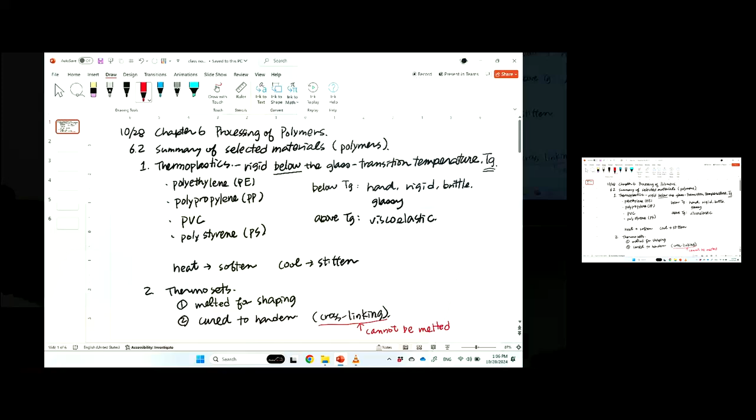more. So previously, with thermoplastic, you heat up, and it's going to be softer, right? So those are the two fundamental differences. Okay? So can I change page? So it's a continuation. In this case, thermoset, and heat, right?

So that's to stiffen, right? And then cool down. So it's still stiff already, it's just cool, it's like curing. No change. I mean, it's not going to be softened. So basically I will go like that. That's cool down. So that's a major difference.

And then this, cool down, or even heat up, that's curing, right? So this stiffens or becomes even harder. That curing part can be chemical, like epoxy, but also radiation, sometimes light. Radiation is also curing, kind of heating inside, and then the polymer is not softened, it just goes back to room temperature, you just have to cool down.

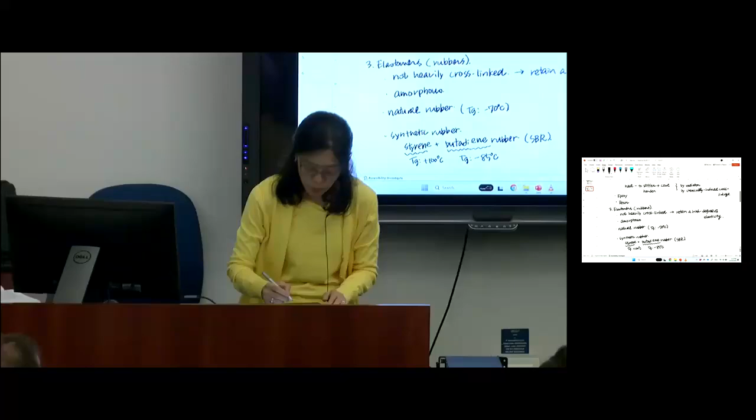But it means their tire has to withstand that kind of severe high temperature and also sliding. So they're totally different, but it's still rubber. Like, the color is black, right? And so anyway, that's how they manage. So this ratio is the key to control their performance, the product. Right? Again, Tg, they are controlling.

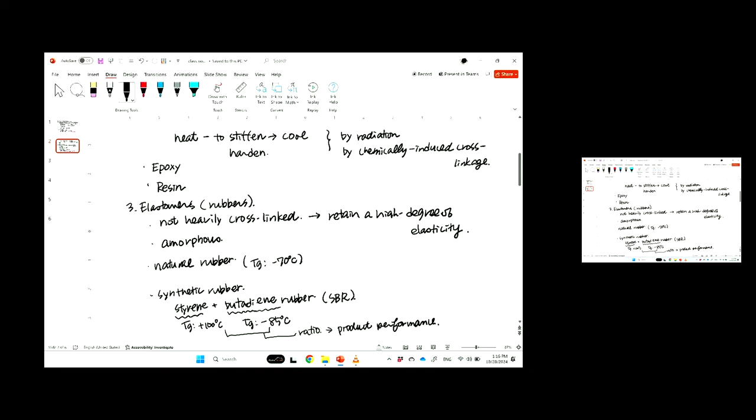So I think that's the review: three major kinds, and why they behave like what you see. So let's talk about the processing, because now we know what kind. So process-wise, section 6.4. Okay. So there are several things included in the textbook. I'm just going to list them, and then let's talk. I also want to share some video, but just the list first.

So extrusion. Extrusion is extrusion, okay? You know the metal or even candy, some rubbery candy. I don't eat that, but some Twizzlers, or something like that. Extrusion, right? And then injection molding. And then 6.4.3, that's compression molding. And then also transfer.

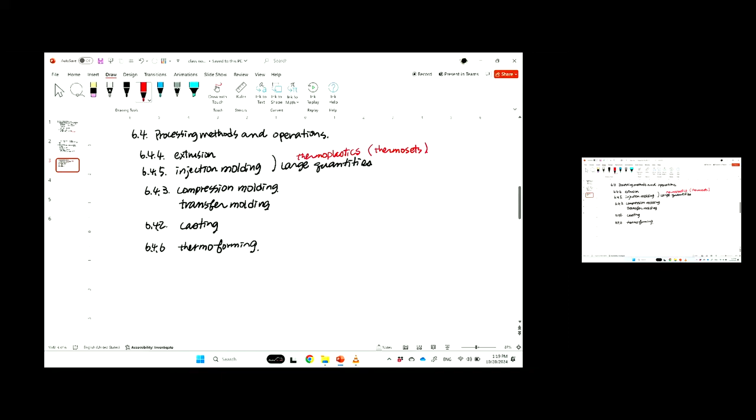Then compression molding. So thermosets, how they are made, how they can be used: compression molding. That's most of the case, because it's not flowable. So you put a little bit in, warm it up, and then compress. Again, I will share the video and the picture soon. And then also transfer molding, thermosets maybe used more. I will leave the figures: figure 6.15 and figure 6.16. And casting I've already covered. Casting is casting.

I think then, before we watch the video, thermoforming.

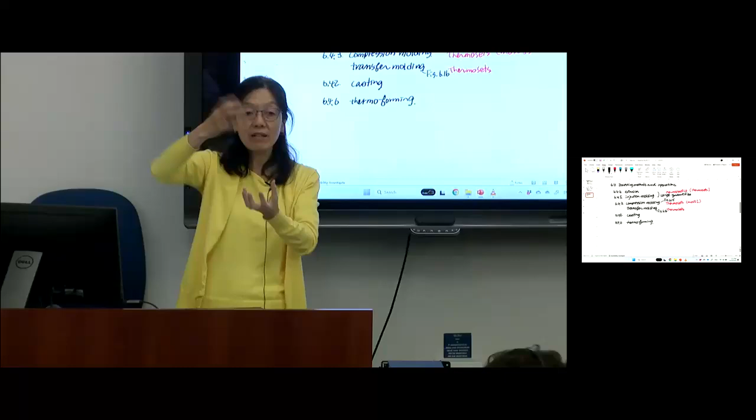Thermoforming is the one to make like a plastic cup, like a transparent cup. You pour a drink. She's drinking coffee. That's, sorry, yeah, that's one, right? Thank you for volunteering. That's thermoforming. Because how much is it going to cost? Usually it's like a stack, right? If you go to a store, you can buy maybe 30 or 50 at a certain cost, right? And then you are using it probably only one time.

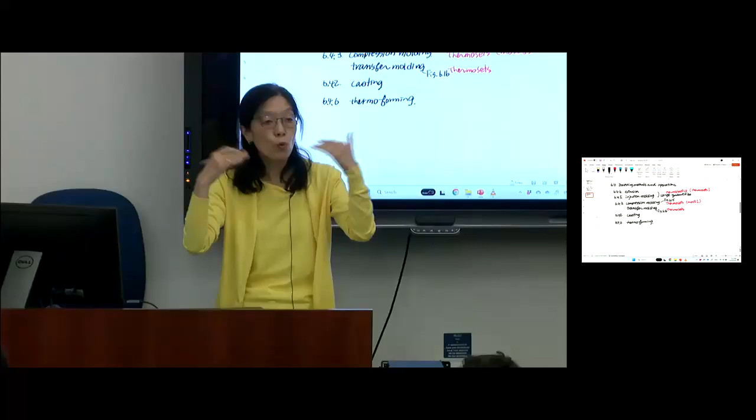So basically, starting from the film or sheet, you warm it up, and then you have a mold, and you warm up and also vacuum, and then adhere. Well, no, I shouldn't say adhere. Just maybe replicate, or cover the mold, and then you remove it, and then you can go to mass production.

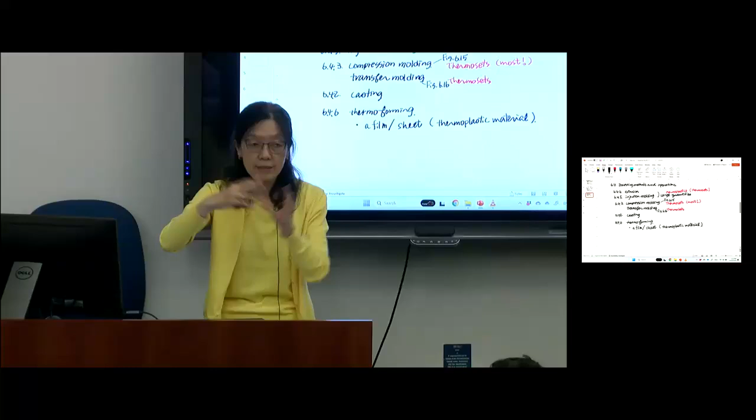Okay, so the key of thermoforming is a film or a sheet of thermoplastic. So basically it's heated above the transition temperature, and then it softens a little bit, right? Since it's thermoplastic, it softens, and then you let it cool down. Okay, this is thermoplastic.

So for this you need a mold, right? And usually they use a vacuum mold, vacuum.

I think I'm using one too much. Vacuum. This is too much. Vacuum. I cannot write vacuum. Oh my goodness. U two, 2 U. I don't know how many. Professor doesn't know how to write vacuum. I'm in trouble. But anyway, this is the vacuum.

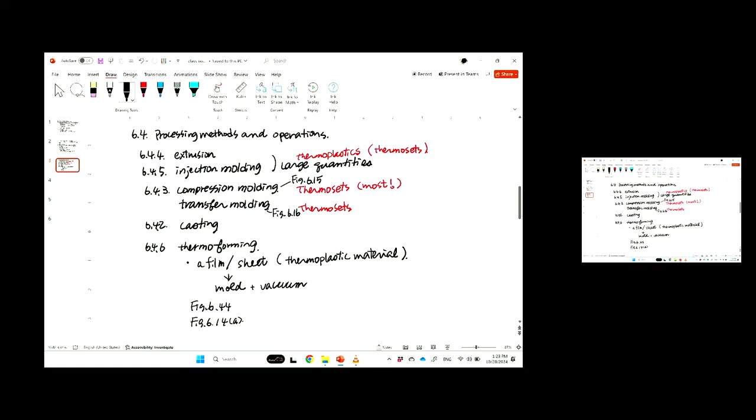And then other than that, there is figure 6.44. 6.44, we need to think. This is not like thermoforming, but I will explain when it comes to the thermoforming section. Okay? And then I think 6.44 and 6.14A, we want to talk about when the time comes, meaning when we come to the picture. So okay, can we move on to a picture or video to explain more?

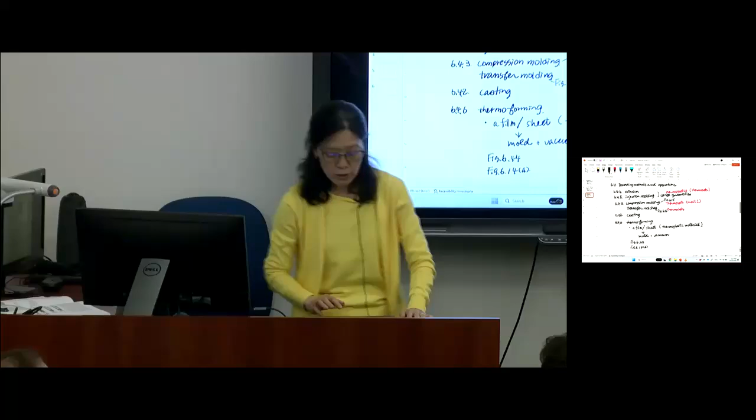So let's go back to first extrusion. Extrusion is just similar to injection molding, because you extrude. We have a video, so let's watch the video first. This is a forming process for plastic, plastic processes. We are going to start from injection molding, and we also want to watch blow molding together, continuously, let's say.

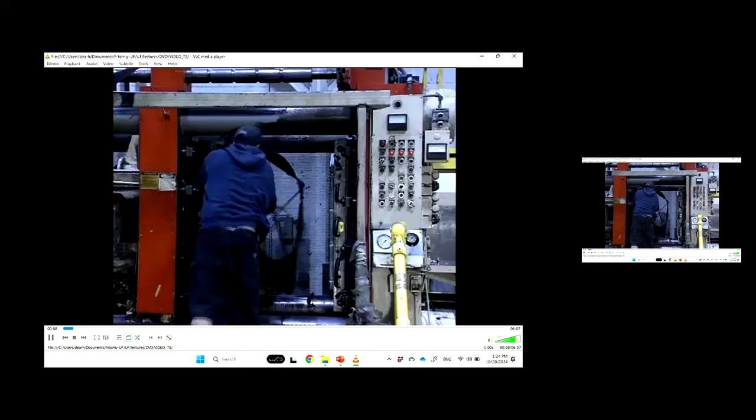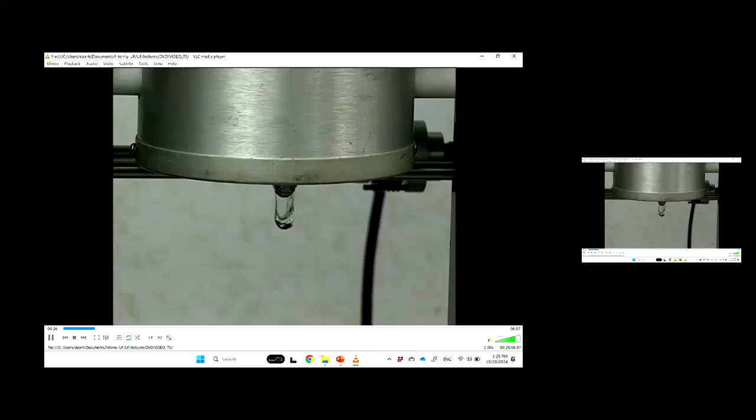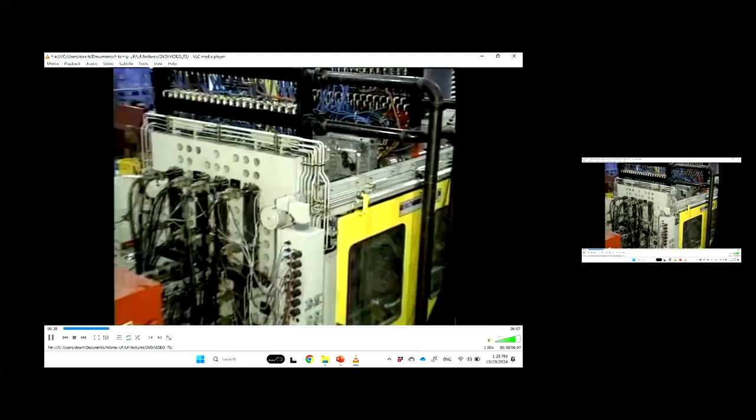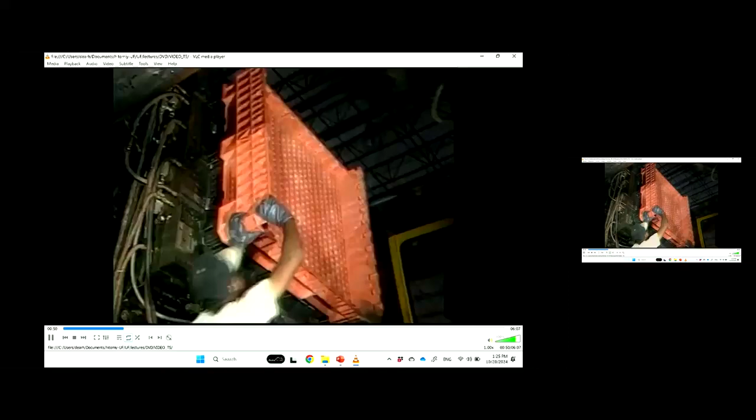To better understand the injection molding process requires understanding some properties inherent in plastic itself. The simplest definition of a plastic is any natural or synthetic polymer that has a high molecular weight. There are two types of plastics, thermoplastic and thermosets. Thermoplastics undergo a reversible change from solid to liquid when heated, and can be cooled and reground for reuse over and over again. Thermosets undergo a chemical reaction between two reagents when heated and achieve their strength through the interlocking chemical bonds. Once molded, thermosets cannot be resoftened. While thermosets are injection moldable, most materials used in injection molding machines are thermoplastics.

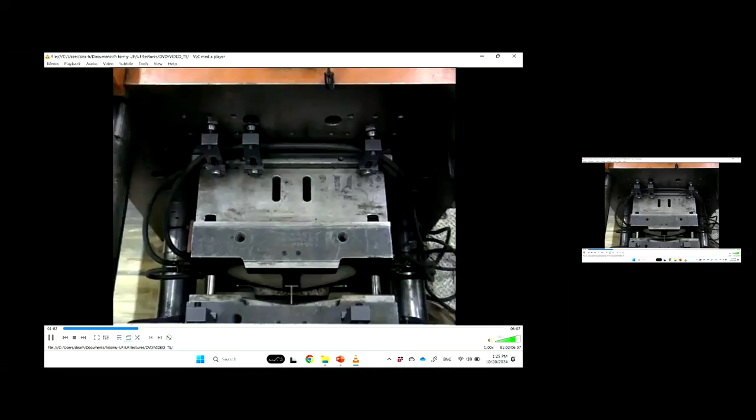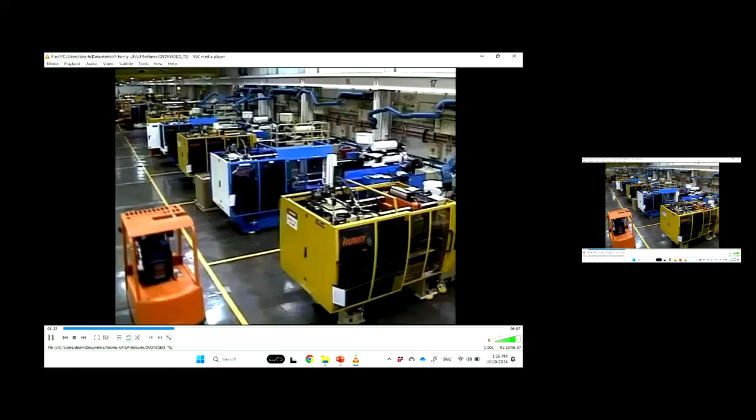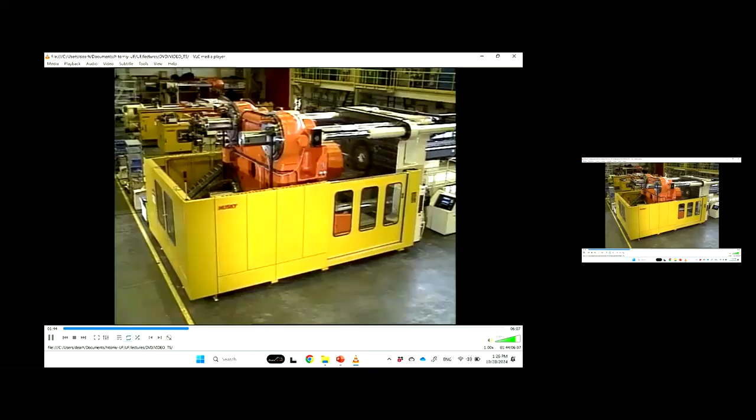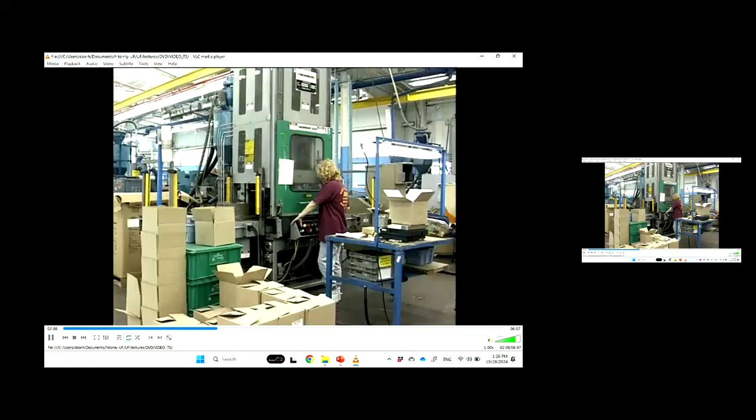Injection molding plastics is extremely complicated because of the infinitely changing pressure, temperature, and velocity inside the mold. These molding conditions directly affect the properties of each molded part. A change in any of the conditions will alter the parts produced. There are 4 primary elements that influence the plastic injection molding process: the molder, the material, the injection machine, and the mold. There are a variety of injection molding machines in use today. The vast majority of these machines are hydraulically actuated and have 3 platens. But newer styles, such as 2-platen injection molding machines and electric injection molding machines, are now gaining market acceptance. Injection molding machines range in size and complexity from desk-size units up to machines the size of a small house. Most injection molding machines are horizontally oriented, but vertically oriented molding machines are available. These vertical machines are primarily used for insert molding.

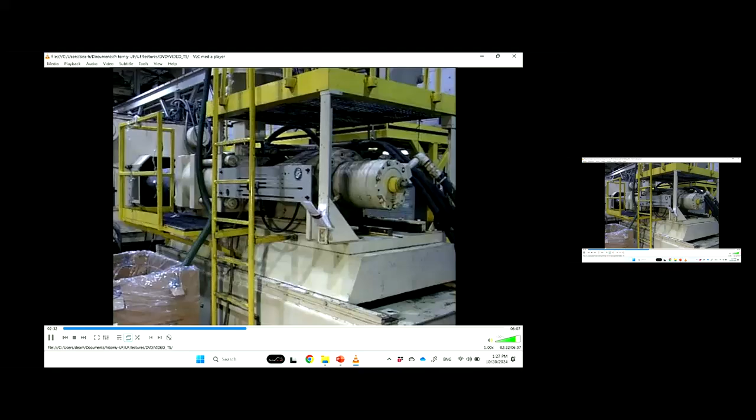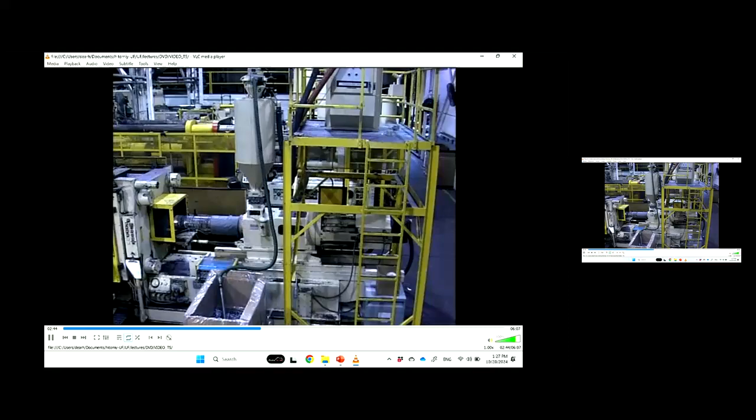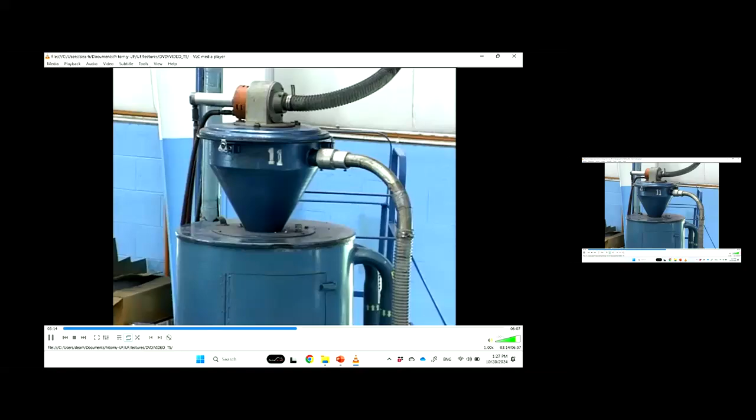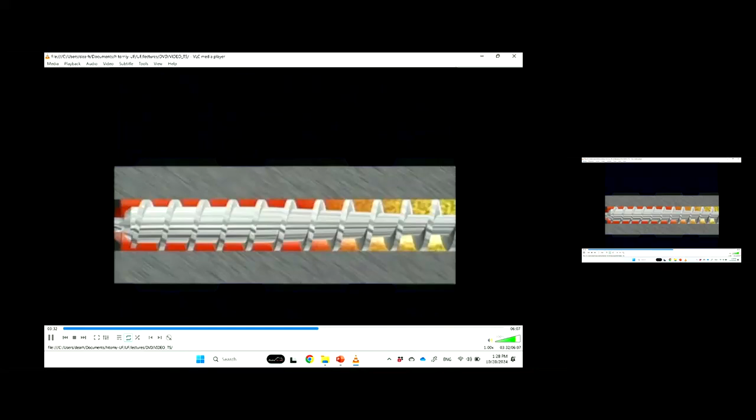All injection molding machines are a combination of 2 systems: an injection system and a clamping system. The injection system heats the thermoplastic material to its appropriate viscosity or flowability and then forcefully injects it into the mold. There are 2 types of injection mechanisms: the reciprocating screw, which is the most common, and the 2-stage screw. The main parts of the reciprocating screw injection system are the hopper, a reciprocating screw inside an externally heated injection barrel, a hydraulic motor, and an injection cylinder. Resin material is fed to the injection barrel from the hopper. These hoppers may be filled manually or vacuum-fed automatically, and often have dryers attached to the top to remove the moisture from the material. As the resin enters the injection barrel, it is driven forward by the rotation of the screw, which is powered by the hydraulic motor. The resin plasticizes or melts as the turning screw drags it towards the nozzle end. This is referred to as drag flow. Drag flow causes the polymer molecules to slide over each other, creating frictional heat, which melts the material.

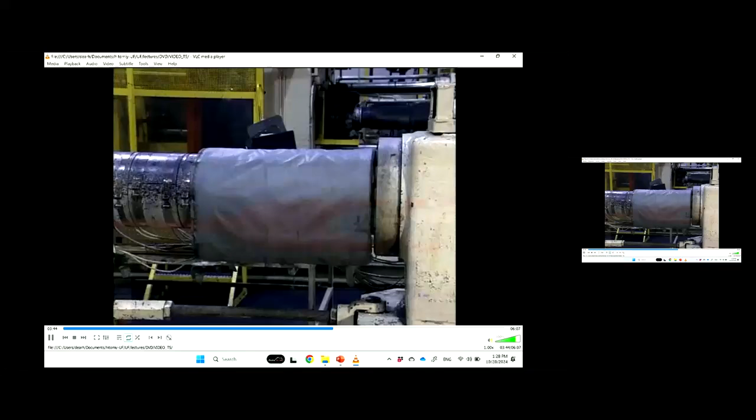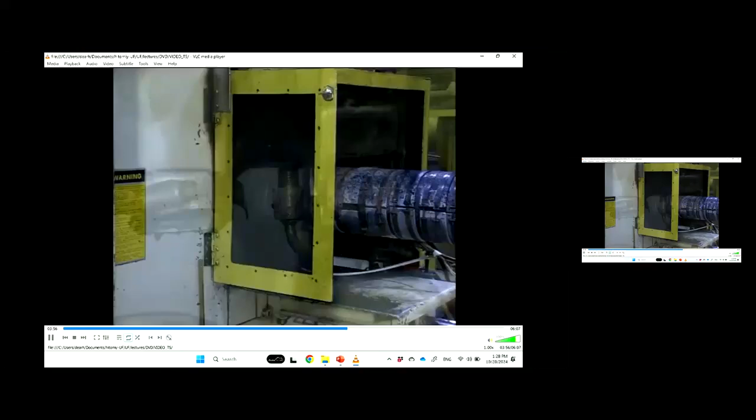External heating bands provide additional heat to the injection barrel. The heating bands bring the material to its final temperature and compensate for the radiation heat loss. The temperature is controlled by 3 thermocouples in the barrel and 1 in the nozzle.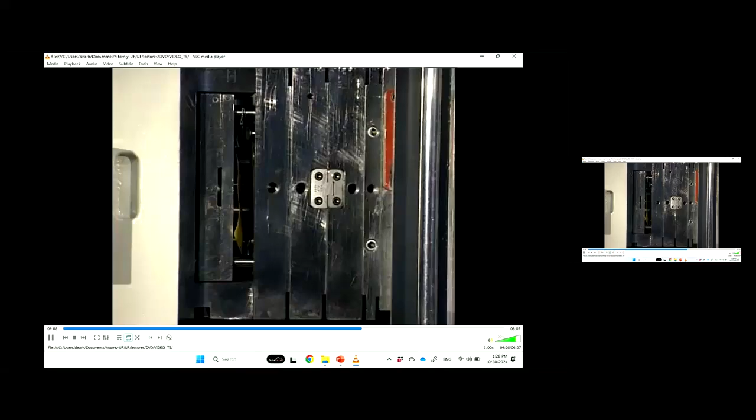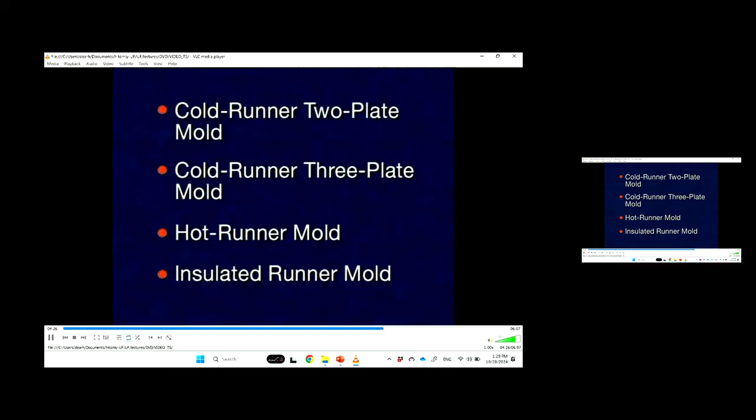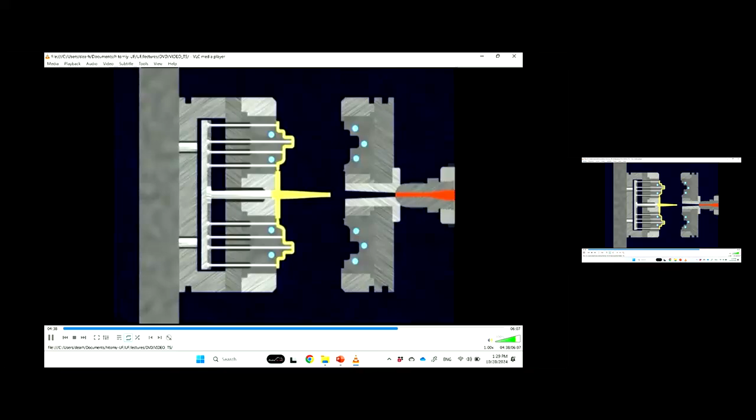Over time, many different mold designs have been developed that meet specific injection molding requirements. These mold designs include the Cold Runner 2-plate mold, the Cold Runner 3-plate mold, the Hot Runner mold, and the Insulated Runner mold. The Cold Runner 2-plate mold consists of 2 plates with the mold cavity and core mounted on them. The Cold Runner system molds the sprue, runners, and gate along with the parts. After ejection, the parts are separated and the rest reground.

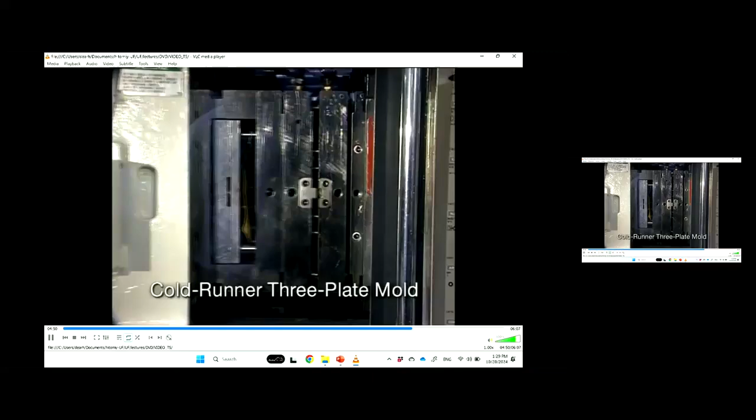The Cold Runner 3-plate mold uses 3 plates to mold the part. These plates include the stationary plate, which contains the sprue, the middle or cavity plate, which holds the cavity, runner, and gate, and the movable plate, which holds the molded part. This type of Cold Runner mold design automatically separates the runner system from the part as the mold opens and is very easy to automate.

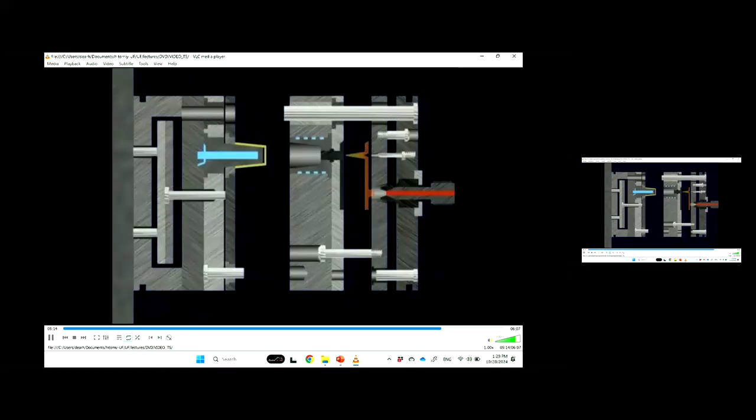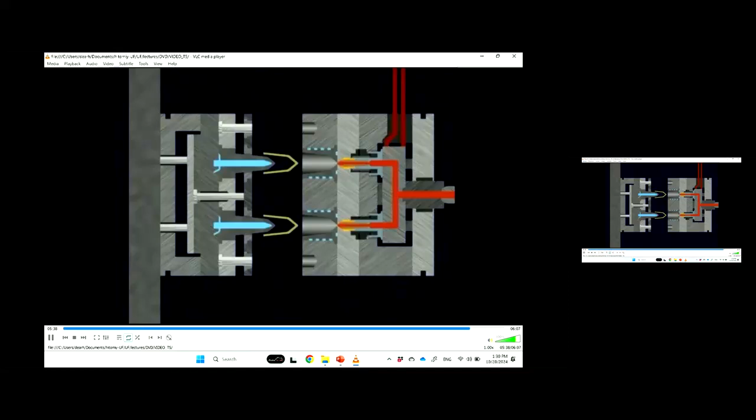The Hot Runner mold uses an electrically heated manifold that keeps the molten thermoplastic in the runners at the same temperature as the heating cylinder. The heated runner system is contained in a plate of its own and does not open during the molding cycle. Because of this, hot runner molds generate no runners or sprues. For this reason, hot runner molding, also known as runnerless molding, is fast and efficient.

The insulated runner mold is much like the hot runner mold, but it uses a large diameter runner. During injection, the outer surface of the runner freezes. This insulates the center material, keeping it at the molding temperature.

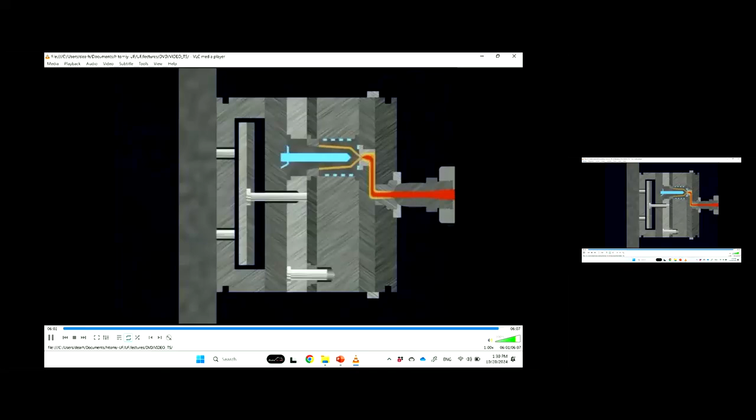Okay, so this is injection molding, but it's really kind of mechanical, right? But same thing, before we go, one more: injection molding.

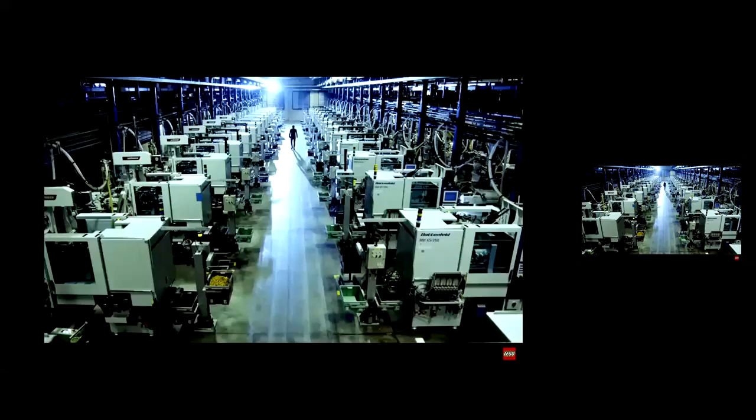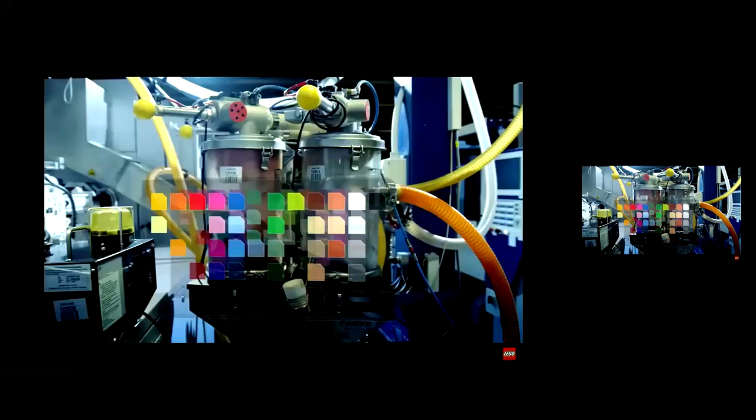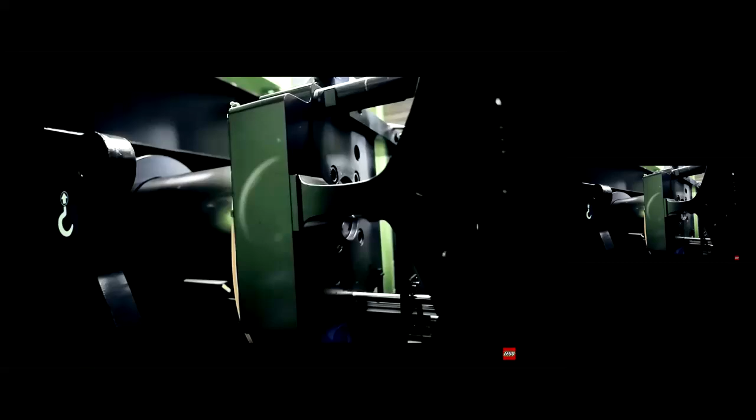Within no time, the granulate is heated to between 230 and 310 degrees Celsius. The plastic melts into a texture much like toothpaste. With great force, the paste is then fed into the mold. Great forces must be controlled during this process. The pressure can reach 29,000 psi. In comparison, a car's tire pressure is 29 to 43 psi. In the mold, the material is cooled in a matter of seconds, and out comes a newborn Lego brick as we know it.

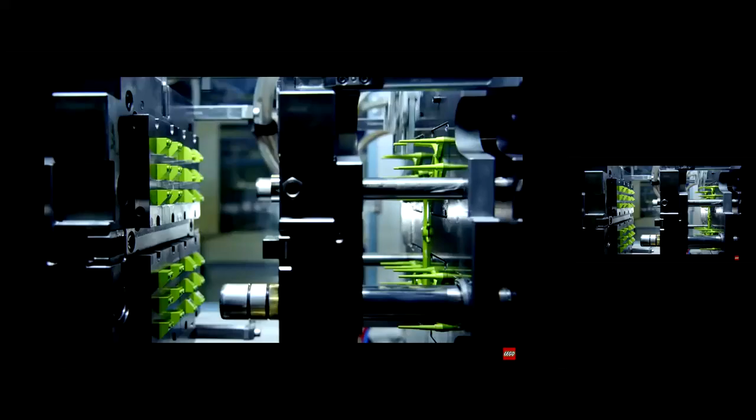This is how Lego is made. I'm going to stop. So the previous video looks really kind of dark side, right? It's like a metal and dirty machine. But same process, if I show Lego, it's more beautiful, right? But it's the same principle.

So anyway, if you still have Lego at home, or when you go home on Thanksgiving or Christmas time, take a look at each Lego character, like a trademark, right? How precise, and the groove, right? And then you process. So Lego can be like protrusion, right? The character. And then also color, I might have mentioned, there are each different colors. Probably when I was young, maybe limited colors. But now, even if it's red, a variety of red through orange, that kind of transition.

And then, if you want to collect or you want to fix some of your Lego, you can contact Lego. Lego is from which country? Where is the headquarters? Denmark, correct, right? And then maybe you don't have to go to Denmark, even I think United States, Texas, somewhere in a factory, then they can tell exactly what color you want to have and they can give it to you. And it's still really nicely matched.

That's amazing, right? Because Lego, additive manufacturing, right? You've been doing additive manufacturing since you are what? 2 years old or 3, like Duplo. Remember Duplo? The big one, right? And then precisely, because even kids' force, like grabbing force kids have, they can do, and then they can remove, right? So that's very precision. But anyway, this is injection molding.

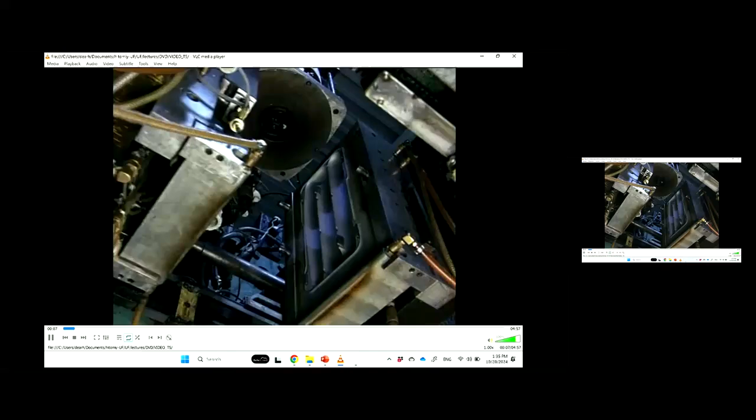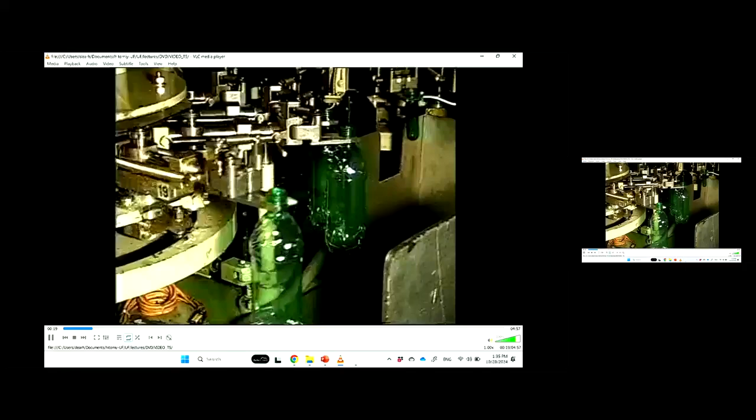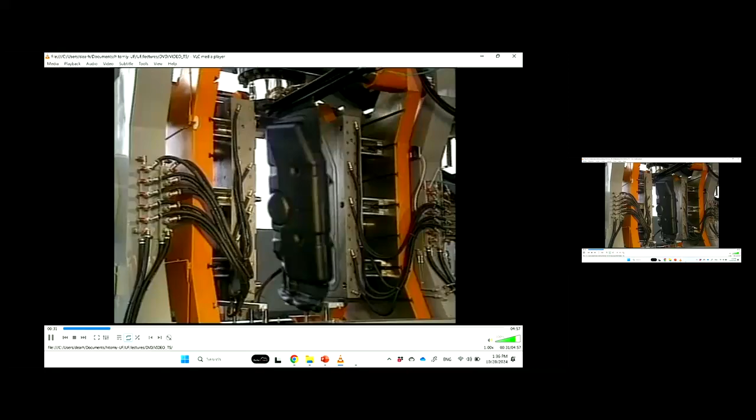Blow molding processes are the most popular methods used to produce hollow products out of thermoplastic materials. Blow molding evolved from the ancient art of glass blowing. Today, it is a leading plastic manufacturing process because of the wide range of plastic resins that can be blow molded and the many possible methods of blow molding. Blow molded parts range in size from the very small to extremely large parts. Bottles and containers are the most common blow molded products, but other items such as highway barrels, automotive components, double-walled cases, toys, medical items, and structural panels are produced.

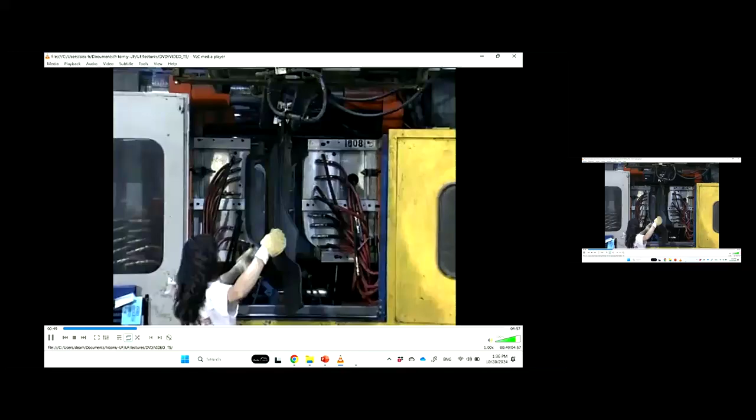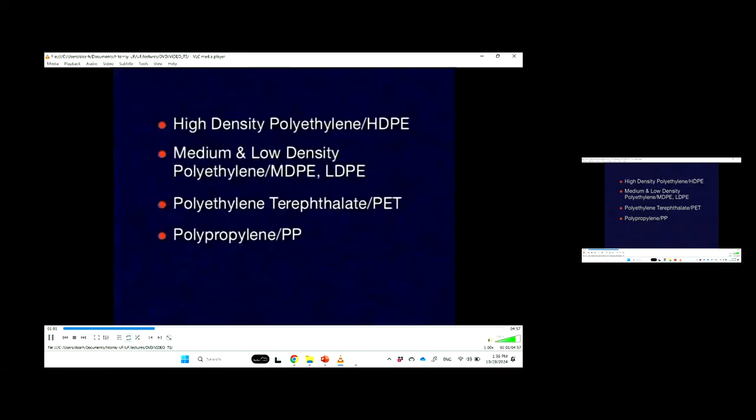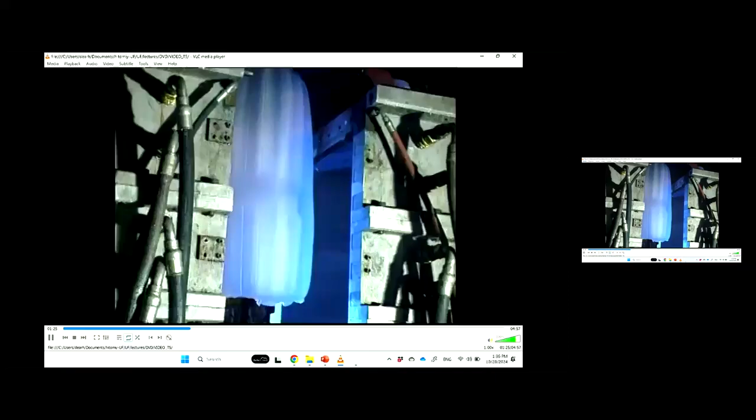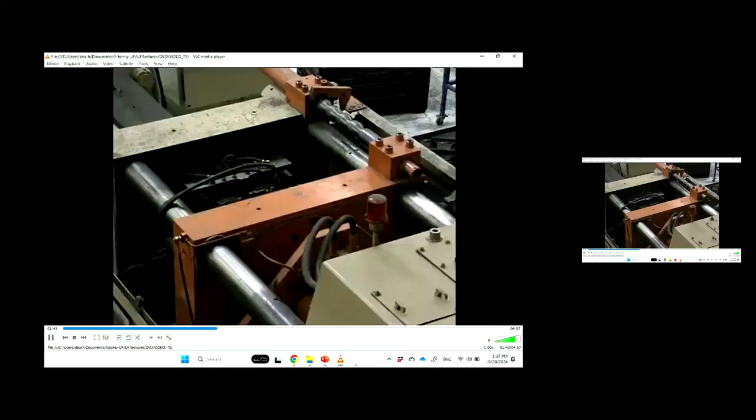Blow molded products are formed from thermoplastic resins such as high-density polyethylene, medium and low-density polyethylene, polyethylene terephthalate, polypropylene, polyvinyl chloride, thermoplastic elastomers, polystyrene, polycarbonate, fluoropolymers, polyamide, and many other materials. Most thermoplastic blow-molded products are produced via extrusion blow molding using high-density polyethylene or HDPE, but there are many additional blow molding processes which include injection blow molding, biaxial stretch blow molding, and co-extrusion blow molding. These blow molding processes all use elements of either extrusion or injection molding or a combination of the two.

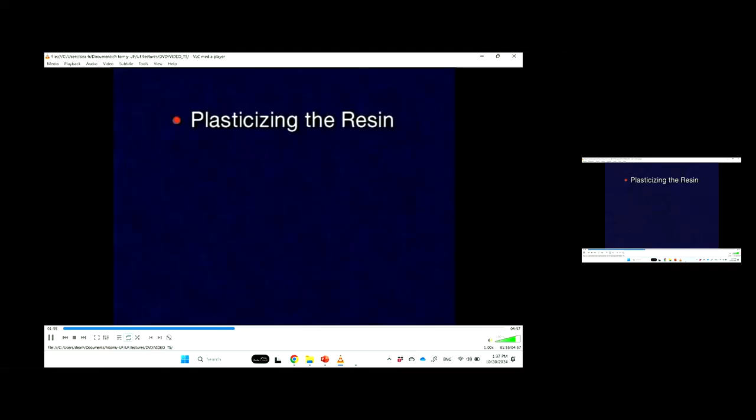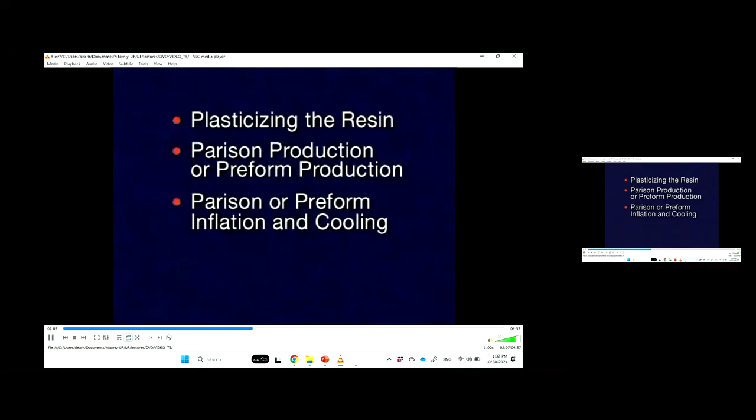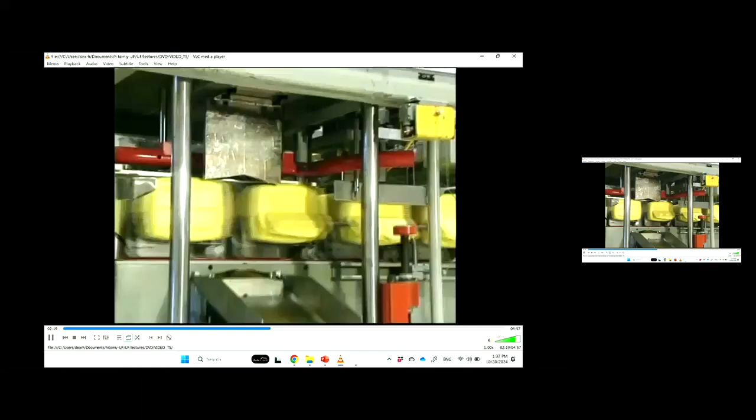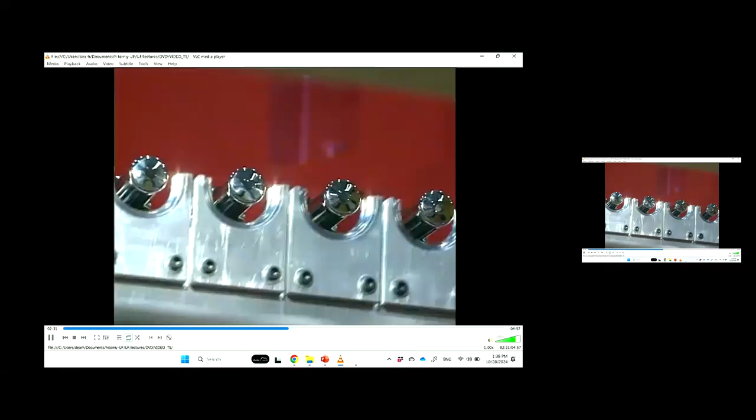In addition, these blow molding processes all share 4 common stages: plasticizing or melting the resin, parison production when referring to most blow molding operations, or preform production when referring to biaxial stretch blow molding, parison or preform inflation and cooling in the blow mold, and ejection from the blow mold. A 5th stage is necessary in extrusion blow molding for trimming and finishing the product. For the most part, blow molding processes all use the same blowing technique, whether it be through a blow pin, a needle, a stuffer, or core rod. It is in the production of the parison or the preform where these processes differ.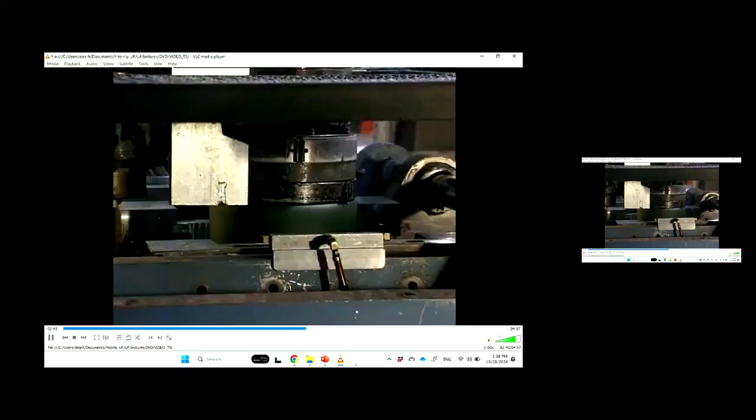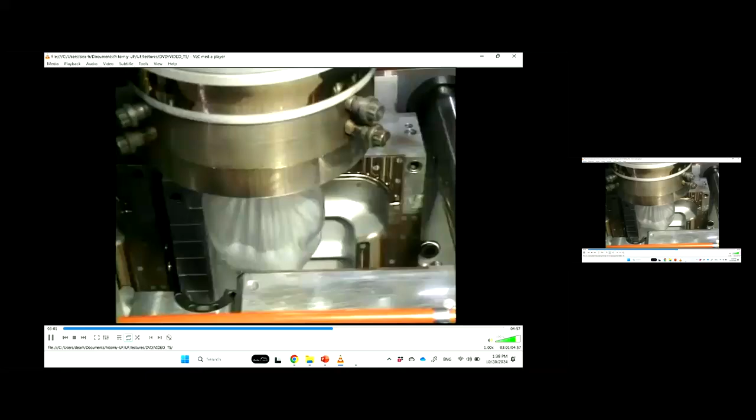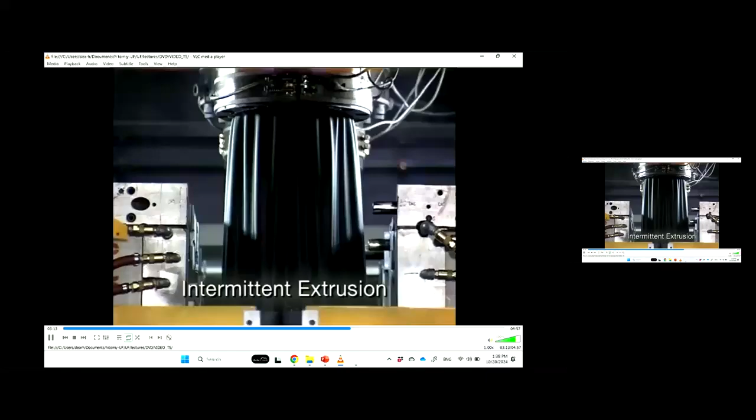The process of extrusion blow molding involves applying heat and pressure to thermoplastic resin to produce what is called the melt. This melt is then forced through a die to produce a parison, which is then dropped, trapped, or conveyed to an open blow mold for subsequent blow molding. Extrusion blow molding uses either an intermittent or continuous method for the formation of the molten parison. Intermittent extrusion produces a parison only when the blow mold is ready. These parisons are produced by using either a reciprocating screw or an accumulator and ram-style machine.

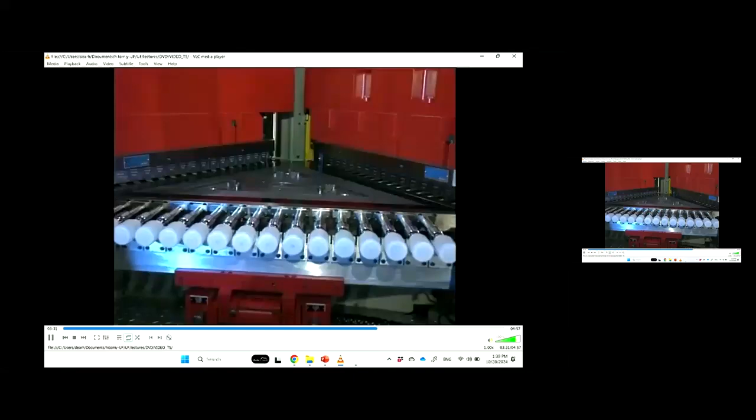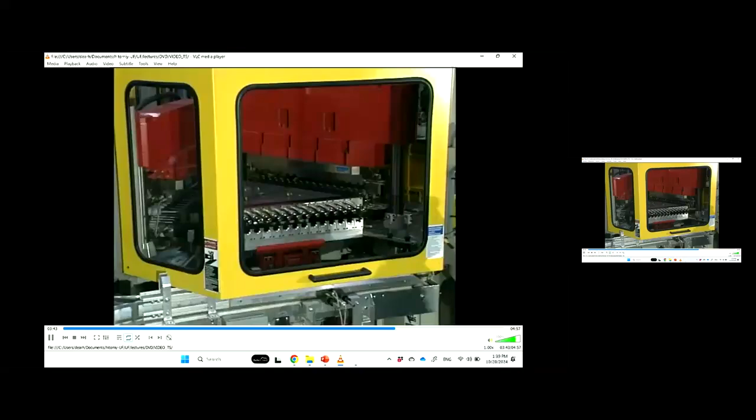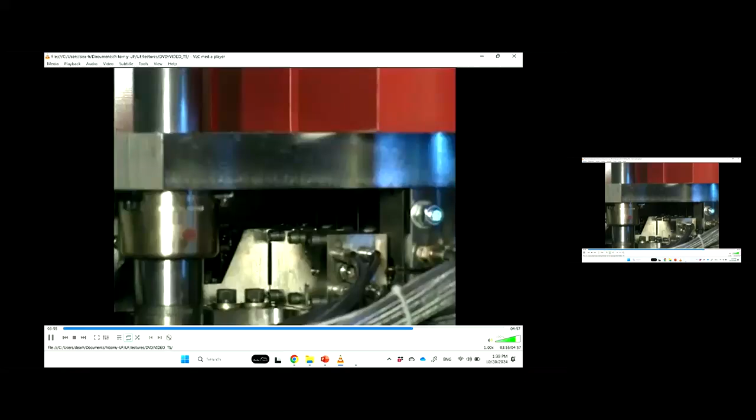Injection blow molding incorporates elements of conventional thermoplastic injection molding with blow molding and is generally more economical than extrusion blow molding for containers under a 1/4 liter in size and large production runs. Injection blow molding machines typically contain 3 stations: the injection station, the blow station, and the strip or eject station. The injection station is basically an injection molding machine. A ram, usually a reciprocating screw, forces the melted thermoplastic resin under pressure onto a metal core rod held within a closed, split parison cavity injection mold. After the outside skin of the parison has set, the parison mold opens, and the core rod carrying the parison rotates to the blow station.

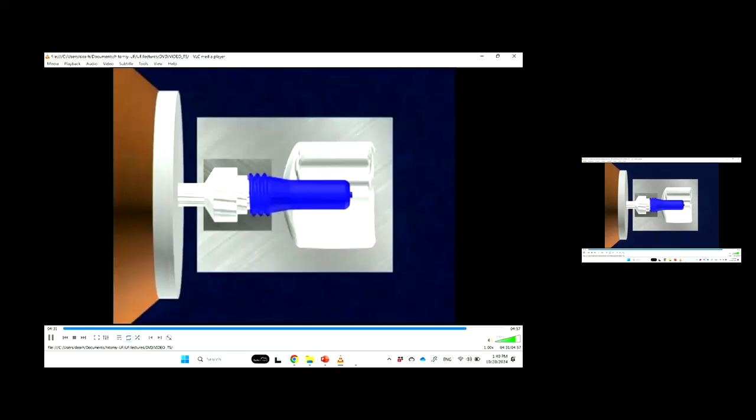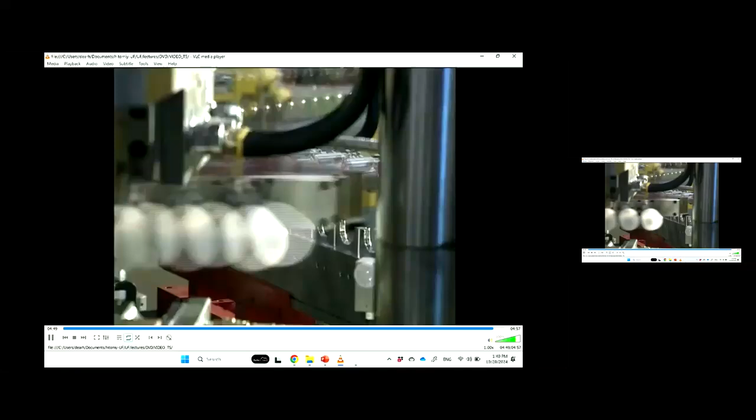Once the core rod is in position, the blow mold closes. A trigger bar opens the core rod air passage. The air lifts the parison from the core rod except where it is held at the neck and expands it to the shape defined by the blow mold cavity. Once the part has cooled sufficiently, the blow mold opens and the part is indexed to the next station for stripping or ejection.

Okay, I think 140. So maybe next time I will cover another video or some picture to complete, and then we will move on to chapter 8, machining section.